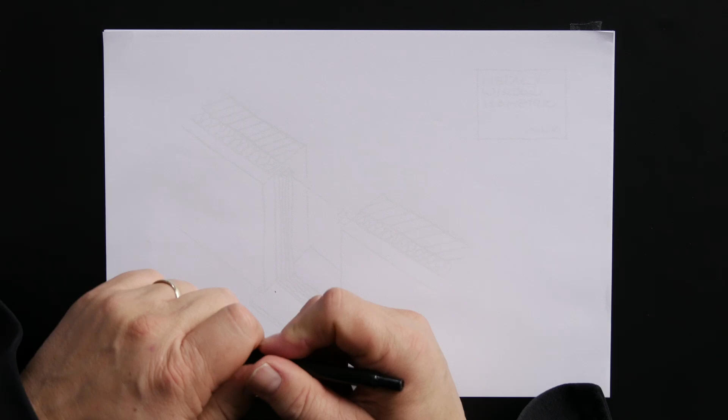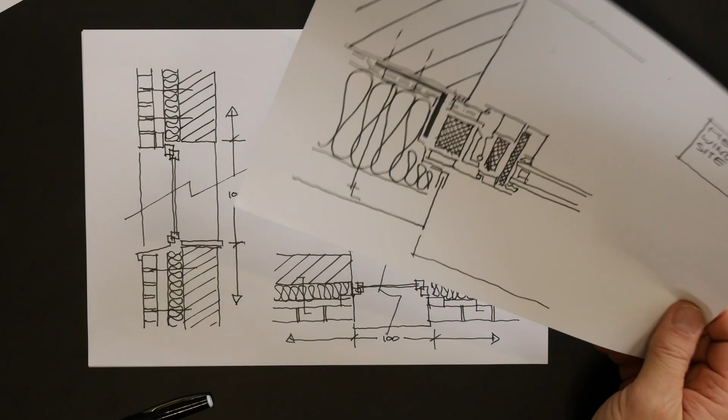So, this is the global geometry for brick cladding. Now we need to find a detail, which we are going to use for the metal. So we make it horizontal. Now it needs brick here. So we do that, but be careful when drawing. You need a little bit more space. A metal cladding is thinner, a couple of millimeters. You're right.

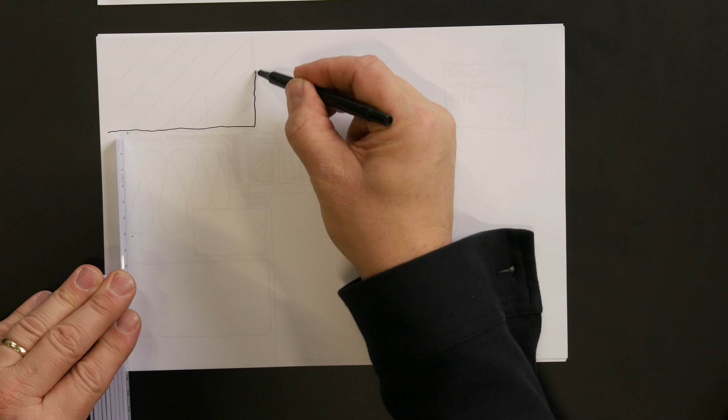Now you need an entire strip of 10, 12, 11 and a half centimeters of bricks. I will actually draw it differently. I will take the insulation here and then draw the wall. Not entirely. Yeah, precisely. So we have some left over there. This is where insulation stops, and then give it another 4 centimeters.

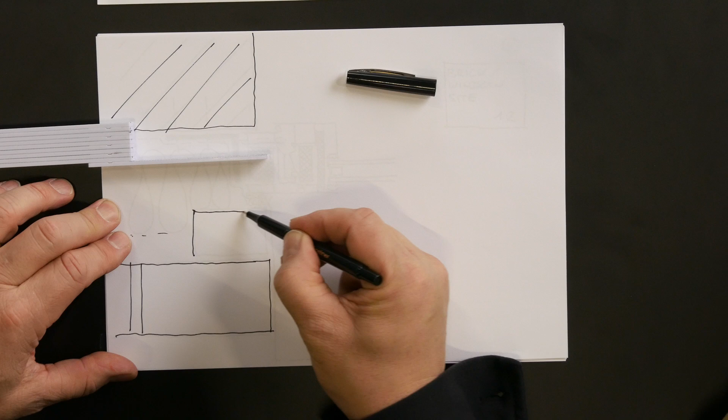Then we do, yeah, till here. So this is bricks. Then I add another piece of brick here. So you also go around the corner a little bit towards the window with the bricks. So this is right now just another brick behind, and on the next layer of the brick there's a 3/4 stone that runs perpendicular to the windows. That makes it a nice corner that looks like a brick wall corner.

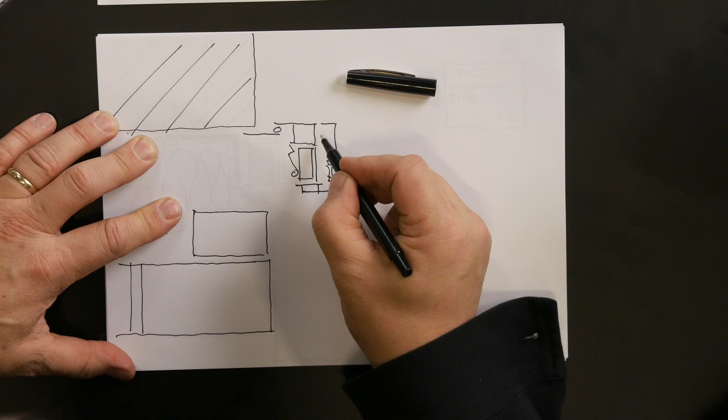And you continue talking while I do the detail. Yeah. If you don't have a stone here, you will show that this is just a thin layer of brick wall. So this actually mimics a little bit more massive wall, but be careful. For instance, if you are using a sunshade, often this space will be used for vertical guiding rails, where the lamella or roller blinds could be guided down. So therefore, have a look. Otherwise, you need to add another few millimeters to take care of that.

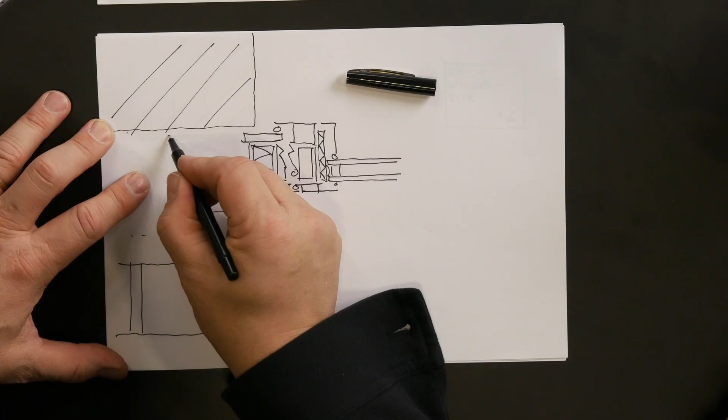We're going to fix the window again in the same way as we did before. Metal brackets are going to be here. And then nicely wrapped with the raincoat, the watertight barrier. Yeah, the raincoat is this layer. You're right, but this is for vapor. This is the inner vapor barrier, the air tightness, which needs to go down here. And I may add a piece of aluminium here to fix it.

Often you can see that there's a compressible band, kind of like foam. That's a sealant, and you squeeze it, put it in, and then it expands, nicely following the line of the rough stones and the mortar to make a perfect seal over there.

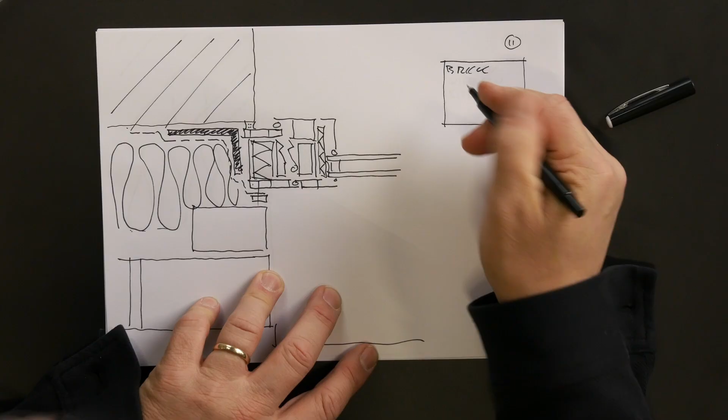Okay. This is the detail. The other one was 10, this is now 11. And it's a brick window. What you often see is that you also integrate the window sill into the brickwork. But that's a little bit a question of where to put this line, here or there, how this window sill works. Precisely. Okay. That's it. Good.